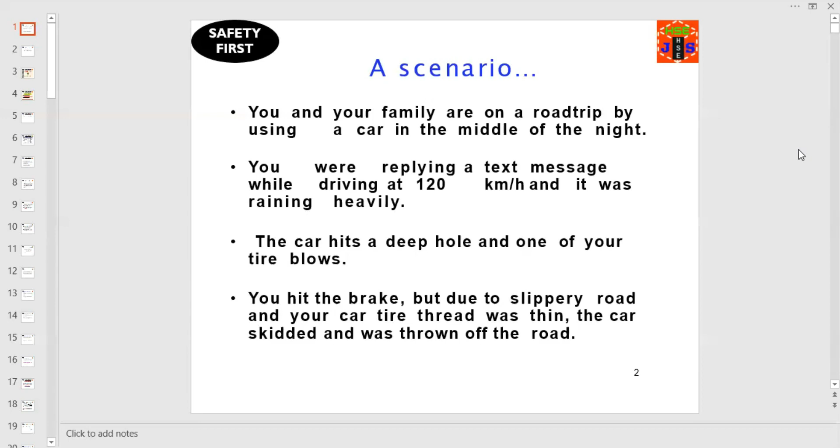Let us start with a scenario. You and your family are on a road trip by car in the middle of the night. You are replying to a text message while driving at 120 km per hour, and it was raining heavily. The car hits a deep hole and one of the tires blows. You hit the brake, but due to the slippery road and thin tire tread, the car skidded and was thrown off the road.

Here, you have to think keenly and intelligently. What is the cause of the accident? What is the consequence of the event? And what can we do to prevent all these things from happening in the first place?

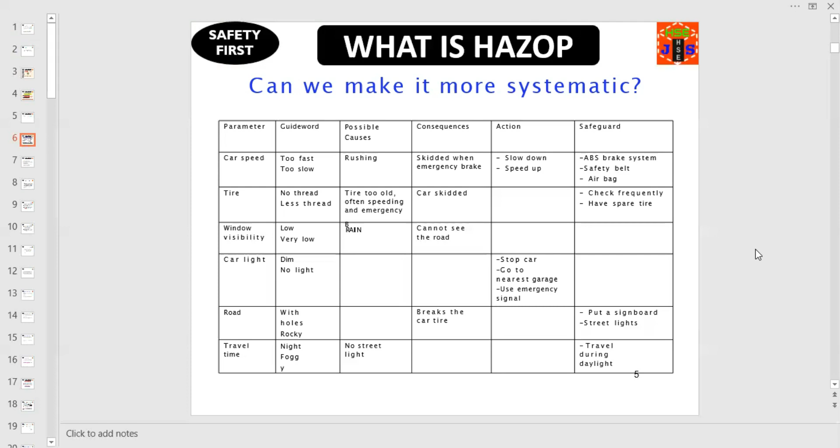So this is the way we have to think about the scenario, by breaking the accident into small portions. Remember, we are looking for hazards, and secondly, we are looking for operational problems.

Dear friends and fellows, let us come to the main topic. What is HAZOP? A systematic technique to identify potential hazards and operating problems. A formal, systematic, rigorous examination of the process and engineering facets of the production facility. A qualitative technique based on guide words to help provoke thoughts about the way deviations from intended operating conditions can lead to hazardous situations or operability problems.

HAZOP is basically for safety. Hazards are the main concern. Operability problems degrade plant performance, product quality, production rate, and profit. Considerable engineering insight is required. Engineers working independently could develop different results.

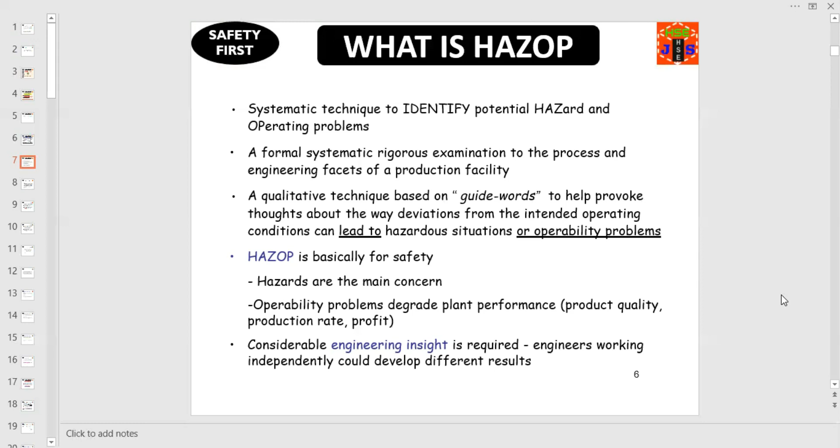I hope this is the easiest language to understand what HAZOP is. Let us discuss the history of HAZOP.

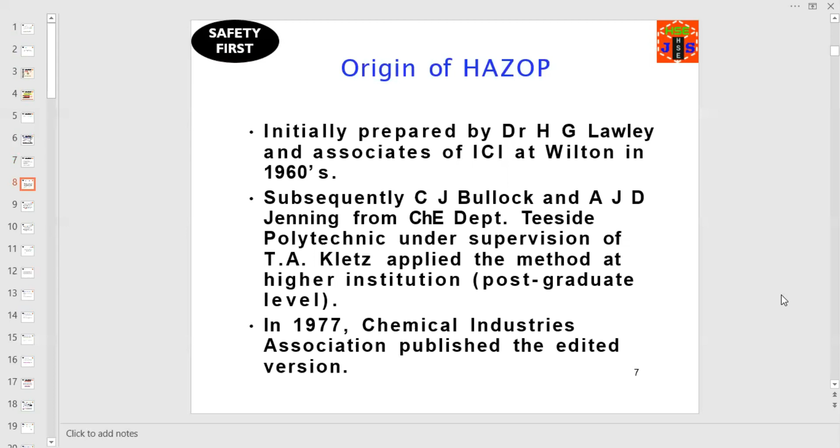Initially prepared by Dr. H.G. Lawley and Associates of ICI at Wilton in the 1960s. Subsequently, C.J. Bullock and A.J.D. Jenning in 1977. The Chemical Industries Association published the edited version. ICI expanded the procedure, called Hazard Study Steps 1 to 6.

These are the most important points. It will help you understand what HAZOP is. Point number 1, project exploration: preliminary project assessment to identify inherent hazards of process chemicals, site suitability, and probable environmental impact. Important things: hazards of process chemicals, site suitability, and probable environmental impact. You have to remember these words.

Point number 2, project definition: to identify and reduce significant hazards associated with items and areas. Check conformity with relevant standards and codes of practices, COPs.

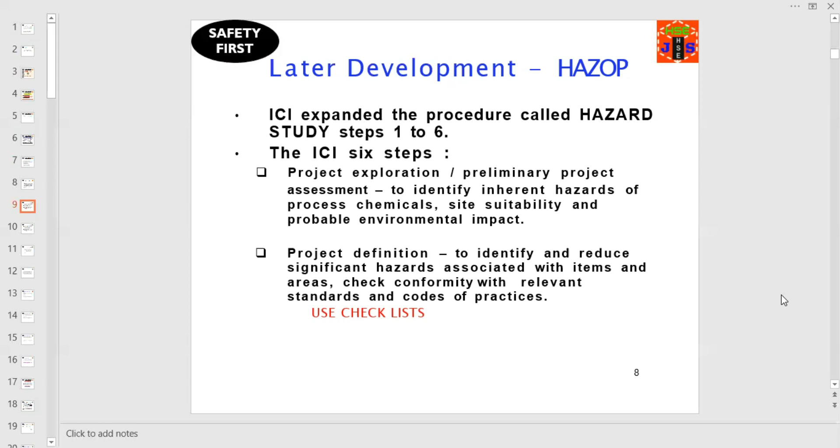You can use checklist here. Point number 3: design and procurement to examine the P&ID in detail for identification of deviations from design intent capable of causing operability problems or hazards.

Point number 4: during final stages of construction, check that all recommended and accepted actions recorded in steps 1, 2, and 3 are implemented. Point number 5: during plant commissioning, check that all relevant statutory requirements have been acknowledged and all installed safety systems are reliably operable.

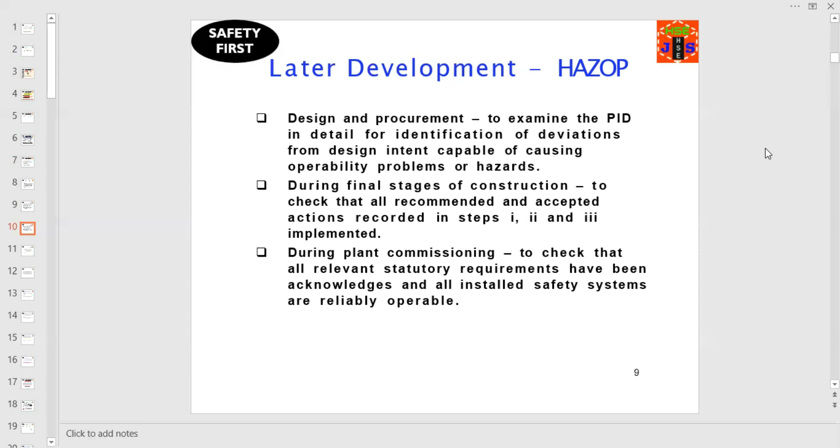The last and sixth point: during normal operation, sometime after startup, especially if any modification has been made, check if changes in operation have not invalidated the HAZOP report of step 3 by introducing new hazards. These steps and procedures are adopted fully or partly by many companies and international organizations around the globe.

Dear friends and fellows, you are watching Safety First. Today we are discussing what is HAZOP. Let us understand now what is the objective of HAZOP.

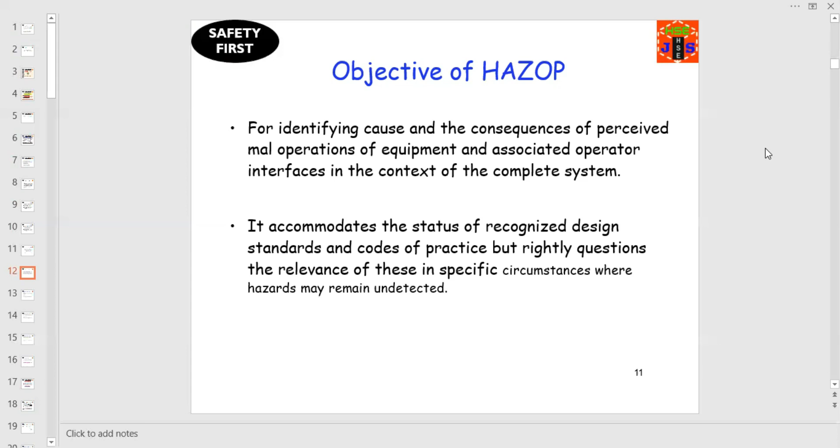There are two main objectives of HAZOP. Number 1, for identifying cause and consequences of perceived maloperations of equipment and associated operator interfaces in the context of the complete system. Number 2, it accommodates the status of recognized design standards and codes of practice, but rightly questions the relevance of these in specific circumstances where hazards may remain undetected.

Do you know how, where, and why HAZOP is used? HAZOP identifies potential hazards, failures, and operability problems. Its use is recommended as a principal method by professional institutions and legislators on the basis of proven capabilities for over 60 years.

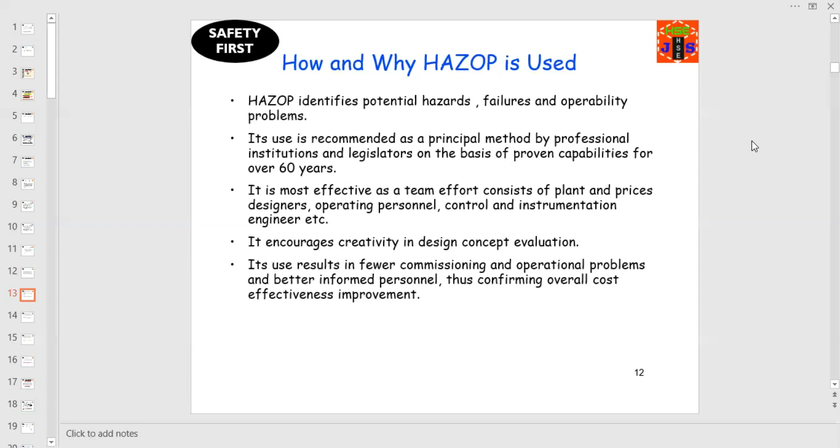It is most effective as a team effort, consisting of plant and process designers, operating personnel, control and instrumentation engineers, etc. It encourages creativity in design concept evaluation. Its use results in fewer commissioning and operational problems and better informed personnel, thus confirming overall cost effectiveness improvement.

Necessary changes to a system for eliminating or reducing the probability of operating deviations are suggested by the analytical procedure. HAZOP provides a necessary management tool and bonus in that it demonstrates to insurers and inspectors evidence of comprehensive thoroughness. HAZOP reports are an integral part of the plant and safety records and are also applicable to design changes and plant modifications, thereby containing accountability for equipment and its associated human interface throughout the operating lifetime.

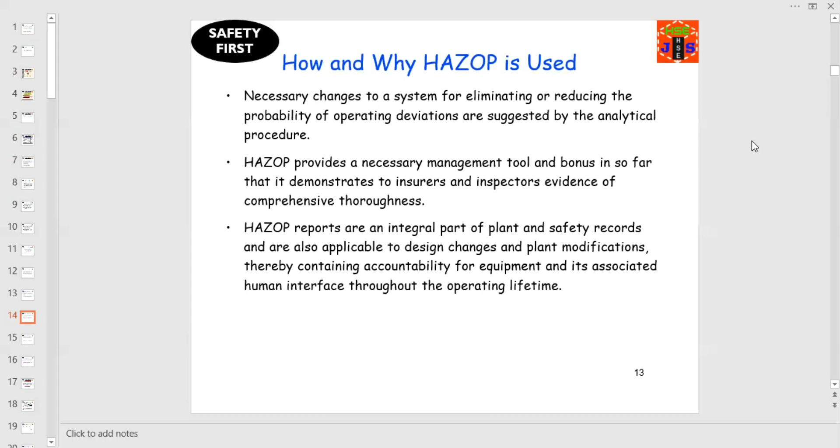HAZOP technique is now used by most major companies handling and processing hazardous materials, especially those where engineering practice involves elevated operating parameters, for example oil and gas production, flammable and toxic chemicals, pharmaceuticals, etc. Progressive legislation is encouraging smaller and specialty manufacturing sites to adopt the method also as standard practice.

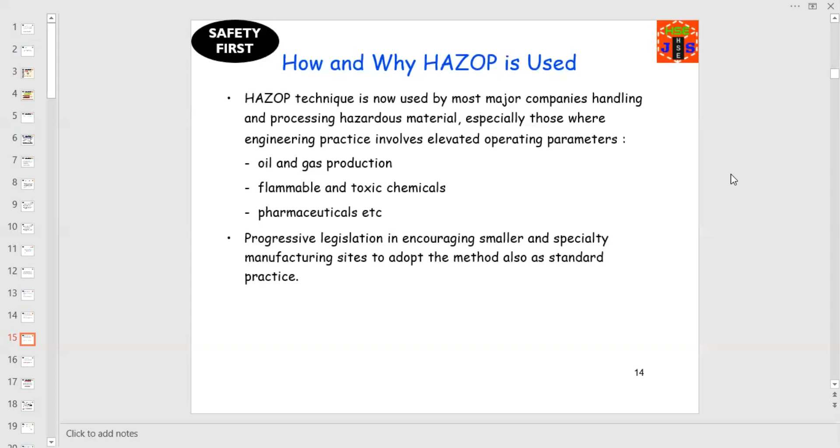These are the reasons why HAZOP is being utilized around the globe by all international organizations and companies, especially those related to oil and gas, pharmaceuticals, and flammable or toxic chemicals.

In the last part of this training presentation, let us understand the purpose of HAZOP. It emphasizes the operating integrity of a system, thereby leading methodically to the most potential and detectable deviations which could conceivably arise in the course of normal operating routine, including startup and shutdown procedures, as well as steady state operations.

It is important to remember at all times that HAZOP is an identifying technique and not intended as a means of solving problems, nor is the method intended to be used solely as an undisciplined means of searching for hazardous scenarios. In all organizations, most of the time, the client and the consultant ask for a HAZOP plan.

But to be very honest, most HSE practitioners are not able to understand exactly what they have to do and what the purpose of HAZOP is.

So this is a basic training session. It's easy for you to understand in the easiest way what is the purpose of HAZOP, what are the objectives of HAZOP, and why, where, and how to use HAZOP.

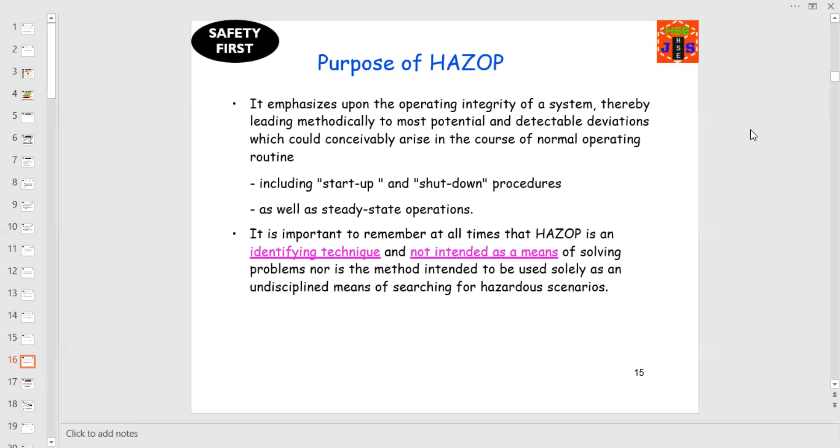In the upcoming video, we'll go in depth to let you understand the philosophy of HAZOP, the hazards and operability. That's all for now, the training session related to HAZOP is over.